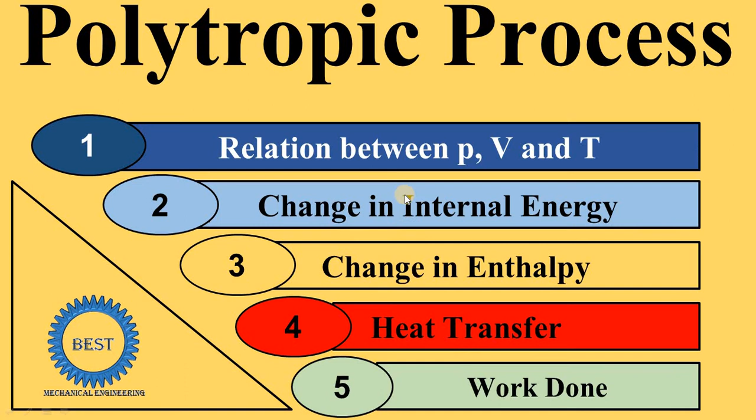In this video, I explain what is polytropic process. Then after, I explain the relationship between pressure, volume and temperature, change in internal energy, change in enthalpy, heat transfer and work done. Means we will find out these 5 types of equations for the polytropic process.

First we understand what is polytropic process. When any gas is heated or cooled in such a way that value of index n is other than 0, 1 and 1.4, it is called as the polytropic process. Now value of index n is 0 for the constant pressure process. Okay, so earlier we already studied constant pressure process.

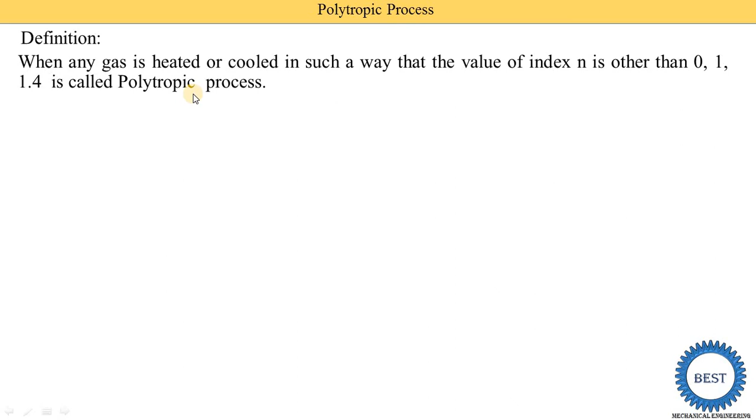So n is equal to 0 is for the constant pressure process, n is equal to 1 for the isothermal process, n is equal to infinite for the constant volume process, and n is equal to 1.4 for the adiabatic process. So if value of n is other than these digits, it is called as the polytropic process.

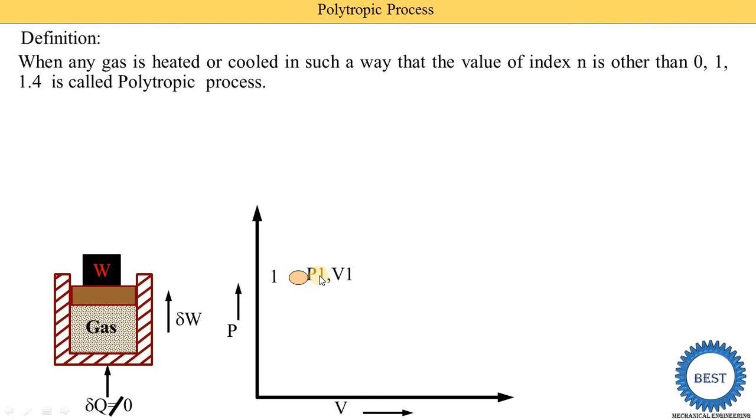Okay, now for that we consider that this is the cylinder piston arrangement. Some weight is put on this piston, gas is filled in it. Okay, and during this process del Q does not equal to 0. Okay, in adiabatic process what we consider, heat interaction is 0, Q is equal to 0. Now when this gas is heated or cooled, okay, so when we heat it, its pressure and volume is increasing. When it is cooled, its pressure is reducing and the volume is increasing.

Okay, so here you see this is the expansion process. So pressure is reduced, volume is increased. Okay, so 1 to 2 process indicates the expansion. Suppose 2 to 1 process is there, then it indicates compression and the volume is reduced, means pressure is increased and volume is reduced.

Polytropic process follows PV raised to n is equal to constant. Okay, in the last videos we learned about the adiabatic process. So in an adiabatic process the law is PV raised to gamma is equal to constant. Okay, so just we need to replace the gamma by the n, then it is converted into the polytropic process. All other equations are same. Okay, so if you clearly understand the adiabatic process, then polytropic process is very simple. Just you need to replace the gamma by the n. Okay, that's over.

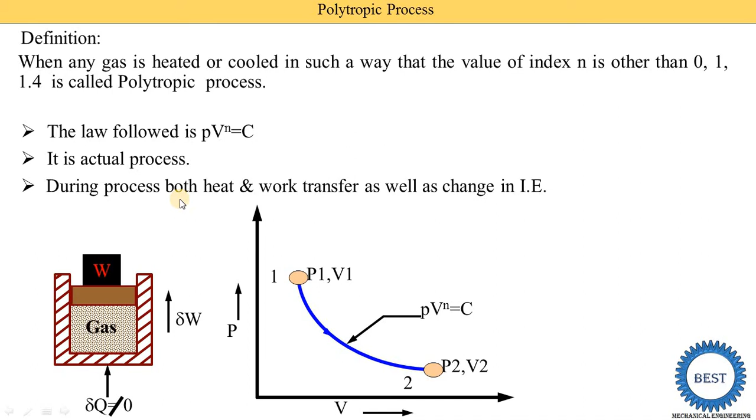And it is the actual process. During the process both heat and work transfer as well as change in internal energy, means during the process heat is transferred as well as the work is transferred. Okay, so when this heat is transferred, then there is some change in the internal energy.

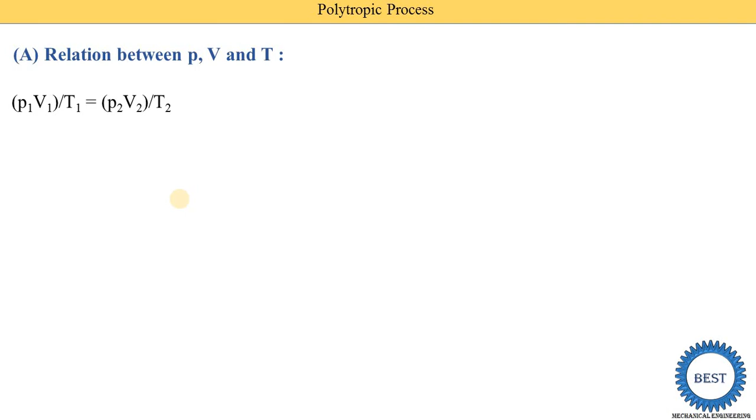Now first we find out the relationship between pressure, volume and temperature. So we find out the two relationships same as the adiabatic process. Okay, so basic equation is P1V1 divided by T1 is equal to P2V2 divided by T2. Okay, so we convert this equation in the form of T2 upon T1. On the right side P2 into V2 is there, and this P1V1 is shifted to the right side. That means P2V2 divided by P1V1. Okay, so it is written like this way, P2 divided by P1 into V2 divided by V1. This is the equation number 1.

And we know that the polytropic process follows the law, that is P1V1 raised to n is equal to P2V2 raised to n. Okay, from this equation we find out P2 upon P1 is equal to V1 divided by V2 raised to n. Okay, so we put this value of P2 upon P1 in the equation number 1. So this P2 upon P1 is replaced by V1 upon V2 raised to n, and V2 upon V1 is as it is. Okay, so finally we get this equation T2 upon T1 is equal to V1 upon V2 raised to n minus 1.

Okay, so here you see the numerator is different. Here V1 upon V2 is there, here V2 upon V1 is there. So we convert this V2 upon V1 in the form of V1 upon V2, then the minus 1 power is coming. Okay, so here power is written n minus 1. Now we find out the second relationship between pressure, volume and temperature. So up to equation number 1 the same procedure is there.

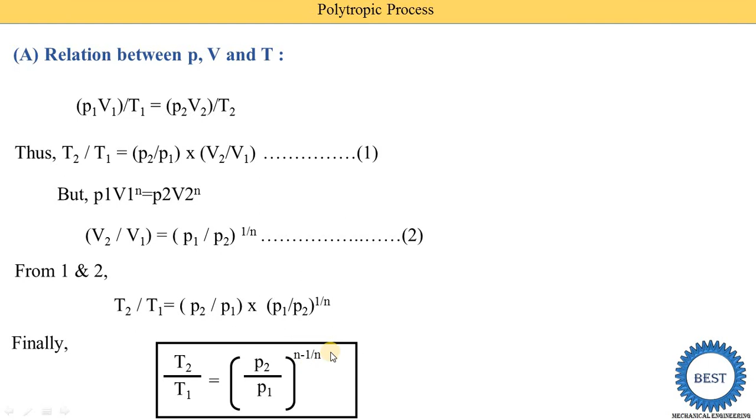And we get this equation: T2 upon T1 is equal to P2 upon P1 into P1 upon P2. Here the numerator and denominator are alternate, so we convert it into the P2 upon P1 form, and then the minus 1 upon n power comes in. So we get T2 upon T1 is equal to P2 upon P1 raised to n minus 1 divided by n. So here we have found these two relationships.

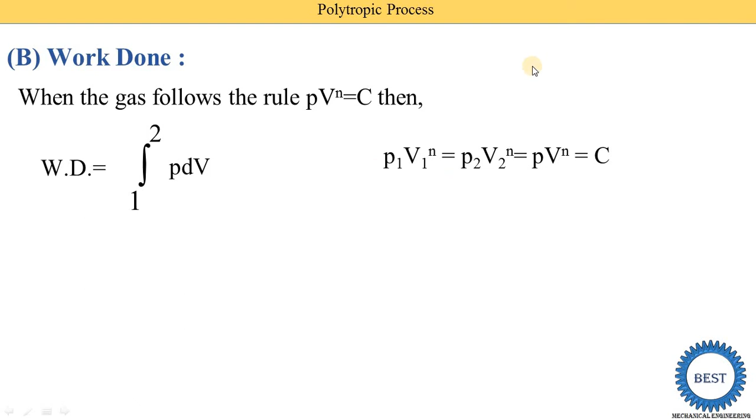Now next we find the equation of the work done when the gas follows the rule PV raised to n is equal to constant. The basic equation of the work done is the pressure into change in the volume, so we integrate this equation for the two states. Now we know that the law is P1 V1 raised to n is equal to P2 V2 raised to n is equal to PV raised to n is constant.

From this equation we get P is equal to C divided by V raised to n, since V raised to n moves to the right side and becomes the denominator of C. Now we put this value of P in the work equation, so P is replaced by C upon V raised to n. Then we need to do the integration. C is a constant parameter, so we don't integrate C; we put it outside the integration.

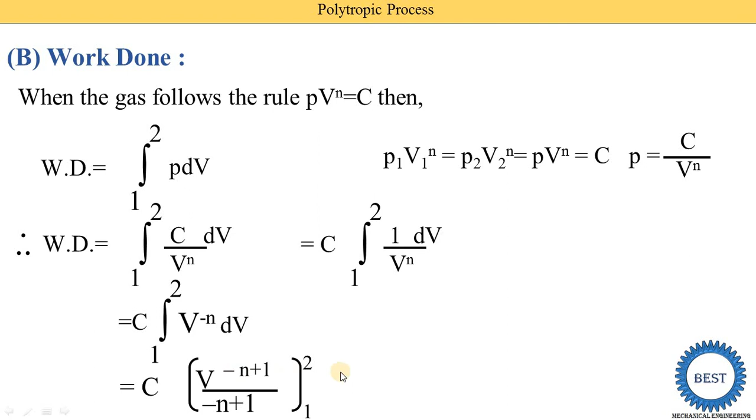So we integrate dV upon V raised to n. To simplify, V raised to n is moved to the numerator, written as V raised to minus n into dV. Integrating, we get V raised to minus n plus 1 divided by minus n plus 1. For the process 1 to 2, we put in the limits V2 and V1. So we get C in bracket V2 raised to minus n plus 1 minus V1 raised to minus n plus 1, divided by minus n plus 1.

Now this C is multiplied with V2 and V1 terms. For the first term we take C as P2 V2 raised to n, and for the second we take C as P1 V1 raised to n, because V1 is there. V2 has the n power and also the minus n plus 1 power, so when they multiply we add the powers: plus n and minus n give 0, and the plus 1 we need not mention, so it is P2 V2. Same way, V1 raised to n times V1 raised to minus n plus 1 cancels to power 1, so we get P1 V1.

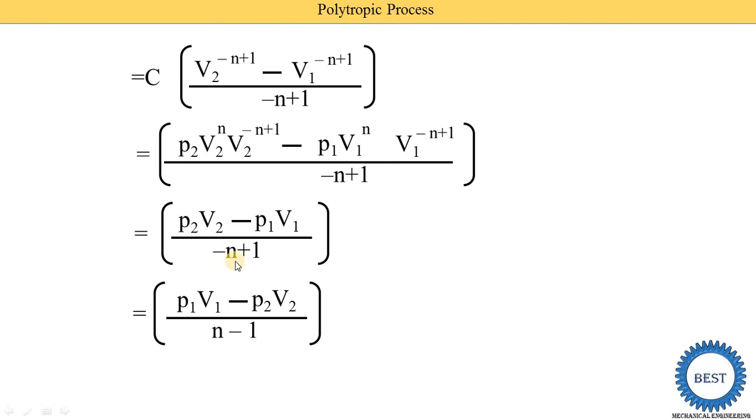Okay, so we get these equations. It is also written this way: P2 V2 minus P1 V1 divided by minus n plus 1. Now we change it into this equation: P1 V1 minus P2 V2 divided by n minus 1. So this is the final equation for the work done for the polytropic process.

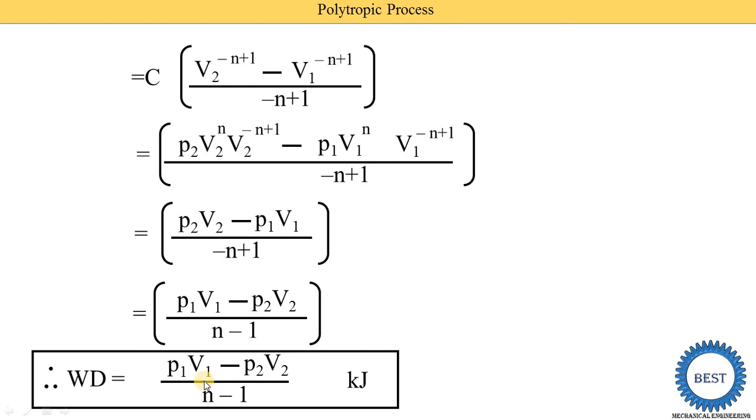What is the change compared to the adiabatic process? In the adiabatic process the same equation is there, but there gamma is used, and here gamma is replaced by n. So the equations for the adiabatic and polytropic processes are the same; we just need to replace gamma by n, and then all the equations are converted into the polytropic process.

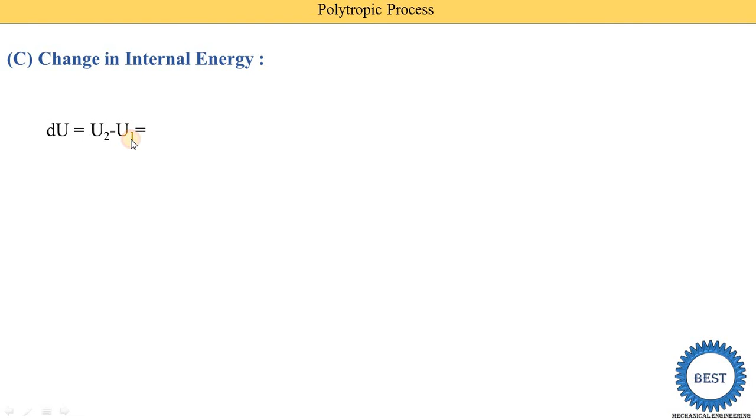Next we find the change in internal energy. Change in internal energy is denoted as dU = U2 minus U1, so dU = mCv (T2 minus T1). The internal energy equation is the same for all processes. Next is change in enthalpy, written as dH. dH = H2 minus H1, and the equation is dH = mCp (T2 minus T1) in kilojoules.

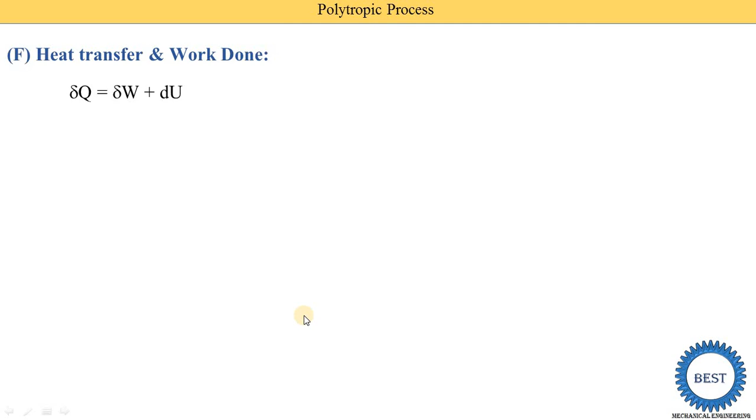Now lastly we find the heat transfer in the form of the work done. In all processes, the heat transfer equation is found from the first law: heat interaction is equal to work interaction plus change in internal energy. We know the internal energy dU is mCv (T2 minus T1), and the work done is P1 V1 minus P2 V2 divided by n minus 1. So we put these values of dU and work done into the first law of thermodynamics.

So we put the equation of internal energy, mCv (T2 minus T1), plus the equation of work done, P1 V1 minus P2 V2 divided by n minus 1. Now we simplify. Here we put the value of Cv: Cv is equal to R divided by gamma minus 1. The other term stays as it is, P1 V1 minus P2 V2 divided by n minus 1. Then we further simplify this equation.

Here mRT2 is there. If we open this bracket, we get mRT2 minus mRT1. We know that PV is equal to mRT, so mRT2 is replaced by P2V2 and mRT1 is replaced by P1V1. So we write minus (P1V1 minus P2V2), just a change in the signs, divided by gamma minus 1. This other term stays as it is.

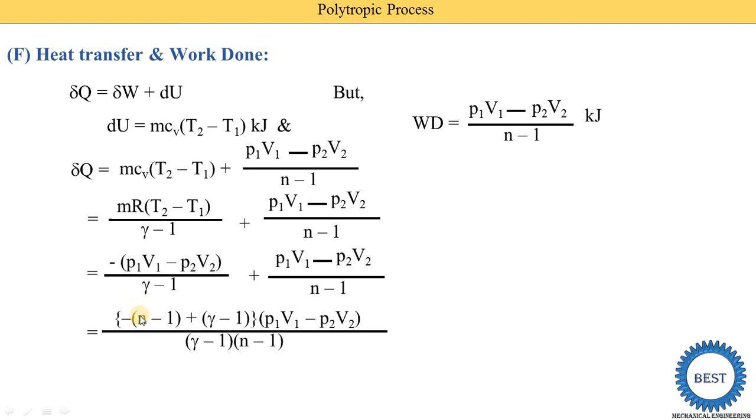Now after some simple mathematical steps we get these equations, with (gamma minus 1)(n minus 1) in the denominator. In the numerator we put minus (n minus 1) plus (gamma minus 1), times P1V1 minus P2V2. Now the term P1V1 minus P2V2 divided by n minus 1 is equal to the work done, as we saw. So it becomes gamma minus n divided by gamma minus 1 into work done.

For the simplification, here minus n is there, minus minus gives plus 1, and here minus 1, so plus 1 and minus 1 cancel. The only remaining part is gamma minus n, and in the lower part gamma minus 1. Instead of this term we write the work done. That's why the heading is heat transfer and work done: the heat transfer equation Q in the form of the work done.